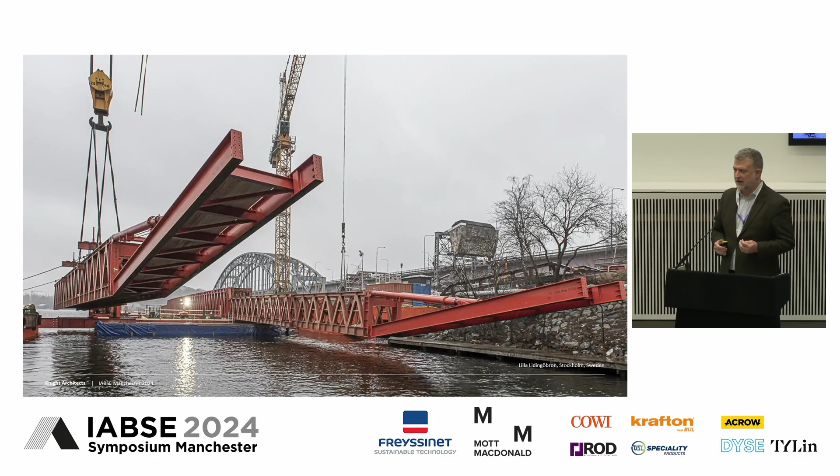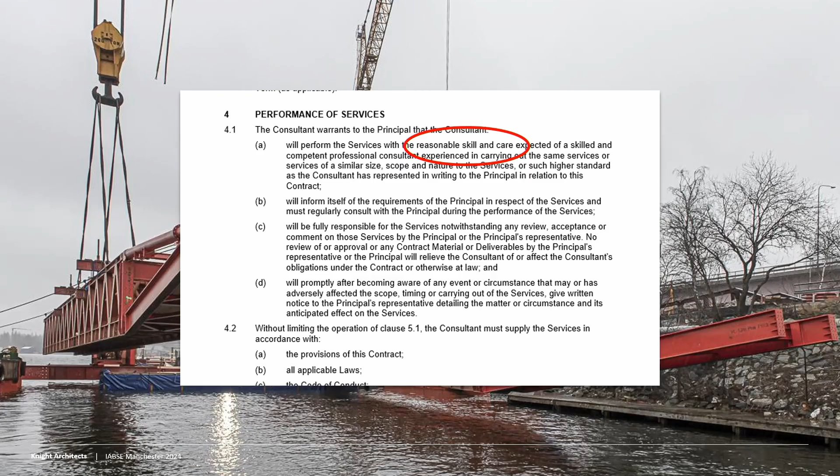And these are obviously highly important to ensure the safety and durability of what we build. So we focus on what's referred to as reasonable skill. They're a key component of our duty as designers, and they're typically enshrined in the contract terms we sign up to. I'm going to leave others to deal with those during the course of this symposium. There's a second part of that duty: to exercise care. And in the contracts we sign, that's interpreted as being careful, attentive, or cautious.

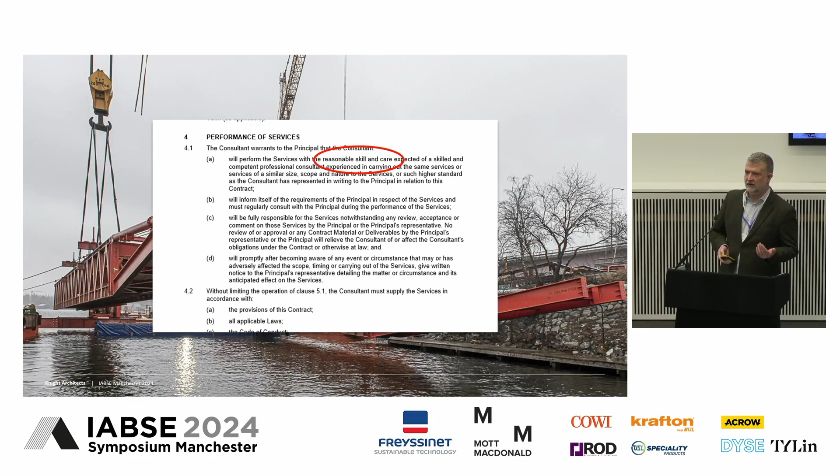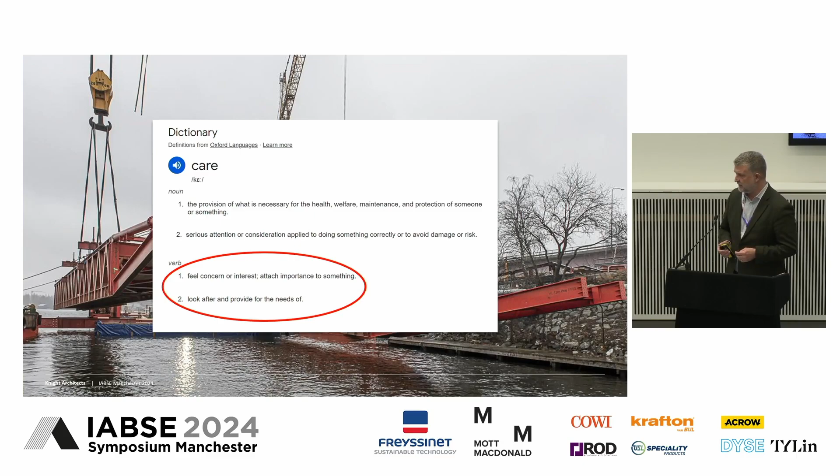But I don't think we should be cautious. I think, on the contrary, we need to be bold. And as Will has just said, boldness has to come from actions and thinking. So inspired by the theme of construction's role for a world in emergency, I'd like to speculate on what it means if we interpreted care as a verb instead of a noun. So, who cares? And I think, obviously, we all should.

Of course, we always should have, but now with the climate and biodiversity emergency upon us, and the gulf in social equity greater than ever both across the world and within countries, it's essential that we all do much more about why we are designing and building, that we care much more about why we are designing and building and who we are doing it for. And before we refine what and how we design and build. In short, why and who must come before what and how. My apologies if you've heard me champion this before.

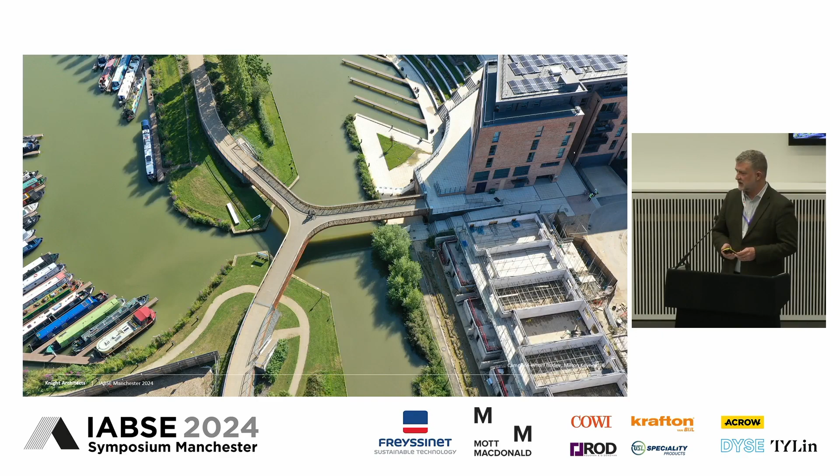Elsewhere in the conference, we'll hear from friends and colleagues who are experts in the assessment of embodied or upfront carbon. But it's obvious that we cannot make an omelette without breaking eggs, even in the refurbishment of existing structures. A creative approach is needed, such as building one bridge instead of two, to maximise the potential value inherent in the project if we are to justify its carbon footprint. So in considering this value for carbon, like we have long considered value for money, we can use our skills to care for the planet and for future generations.

Recently, I was presenting to a group of university students in Delft about bridge design and carbon, when I realized, of course, their generation didn't cause this emergency. They have inherited its massive debt, yet they also have the greatest chance to positively influence change. So they must be inspired and not intimidated or deterred by this challenge.

Or put another way, as behavioural economist Rory Sutherland puts it, asking people to do the right thing for the right reason is potentially setting the bar too high. The fact is, we need to inspire each other and the next generation to participate in the joy of great design, which brings equity, opportunity, pleasure to society, and addresses the climate emergency. So gatherings like this one in Manchester and the Future of Design event for young designers, not just engineers please, are essential to educate but also to inspire and to bring joy.

The joy of design for me comes from seeing it in use, making people's lives better in ways big and small, planned and unexpected.

As an architect practicing in the field of bridge design, which is the acknowledged territory of engineers, I am aware of the focus on function, from which form is supposed to follow, at least in modernist design philosophy, and this order encourages efficient use of materials and should provide solutions that are appropriate to their span and the load carried.

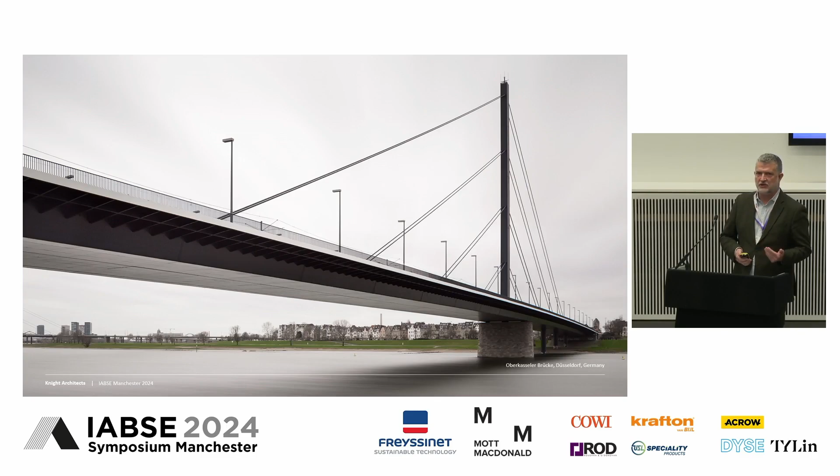But what exactly is the function of a bridge? In my opinion, the function of a bridge is to make people's lives better. This is a much broader and deeper challenge than simply carrying a load safely across an obstacle, which is arguably the minimum measure of performance.

A truly successful bridge should also look beautiful. Its design should respect and enhance its place, and after all, for centuries, great cities and communities have been founded upon great bridges, and the design of civil infrastructure is a measure of how a culture values itself and its people. History shows us that a useful bridge should be positioned and aligned to provide the most attractive route to users.

And in doing so, it shouldn't make the situation worse for others. It should act as a catalyst for improvement to the surrounding public realm. It must provide socially valuable connectivity, for example, by linking communities with jobs, education, amenities, and nature.

And in the age of a climate emergency, and at a time of energy crisis, the function of a bridge must include encouraging modal shift towards energy-efficient forms of mobility, such as rail, tram, and active travel modes, like our Lilla Lidingöbron in Stockholm. Because even while the use of electric cars increases, it's possible or even likely that modal shift will continue to accelerate away from private car use in cities where problems of congestion are unchanged by the power source.

These problems remain even when the car is parked, which is obviously most of the time, and a recent advertising campaign by the rental firm Dott really cleverly illustrated how space-hungry private cars are compared to cycling and walking.

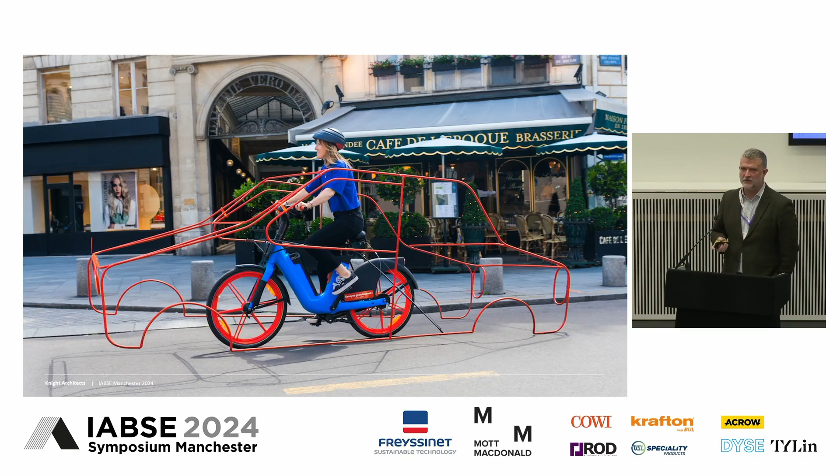And to those who complain this is politicising transport and infrastructure, I say this has always been the case. The building of infrastructure has always had a political component, and we shouldn't shy away from that discussion.

Importantly, once a user is taken out of the comfortable, isolating cocoon of a car, they become much more aware of the surrounding environment and other people. And it's this immediacy which demands design that is safe, enjoyable, inclusive, durable, and beautiful. For a bridge designer, the sensitive needs of pedestrians and cyclists are the greatest and most rewarding challenge.

My professional interest lies in the social benefit created by bridge design as much as their architectural contribution to cities and to landscape. And when good social intentions and beautiful design combine, the results are wonderful and long-lasting, yet supremely functional.

For designers, I think this duty to society demands thinking beyond the footprint of a building to consider how the surrounding environment is changed by the building. For designers of infrastructure, it requires imagination far beyond the basic requirements of moving people from A to B.

Bridges create networks, and it's this positive interaction of people, spaces, and places which create successful cities. Now, this has been recognised by many for a long time, from Jane Jacobs to Jan Gehl, and he stated, only architecture that considers human scale and interaction is successful architecture, culminating in his famous call, first life, then spaces, then buildings. The other way around never works.

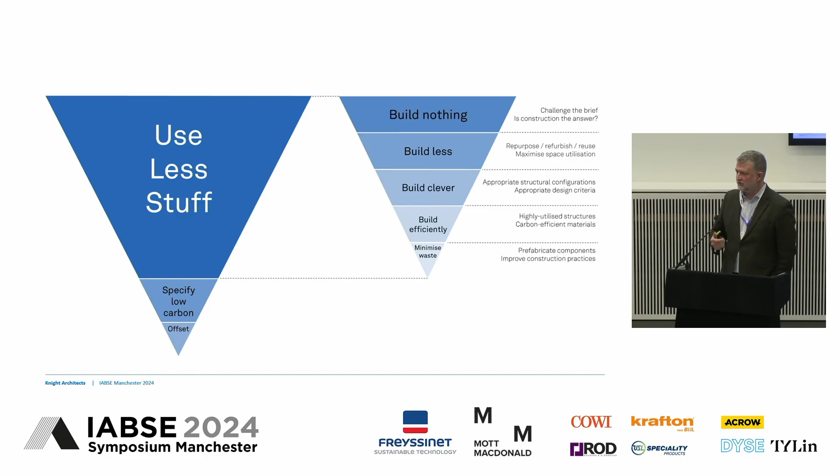And this is not as extraordinary as it sounds. There are many examples of bridges intended to satisfy a political need rather than an actual need, where equivalent functionality could be achieved with little or no carbon cost.

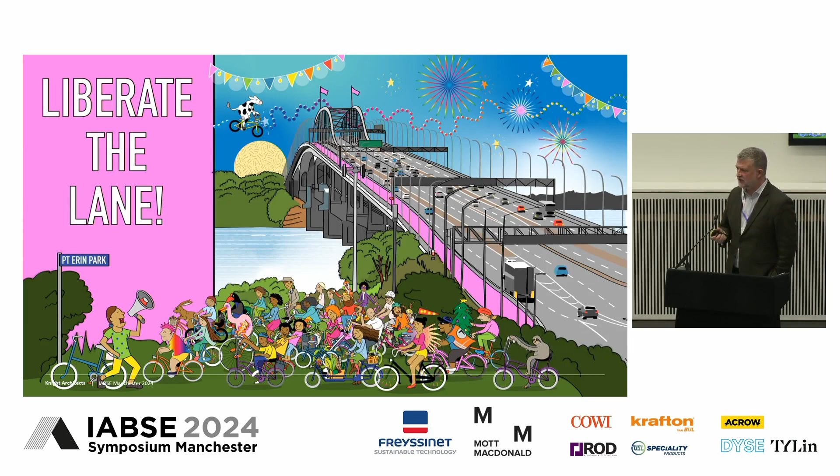Examples including this one: reallocate existing highway space to active travel uses, as campaigned for in New Zealand on the Auckland Harbour Bridge. This is both the easiest physical change and the most difficult political change. It imposes behavioural change upon society at large, and in doing so it risks short-term and indiscriminate inconvenience.

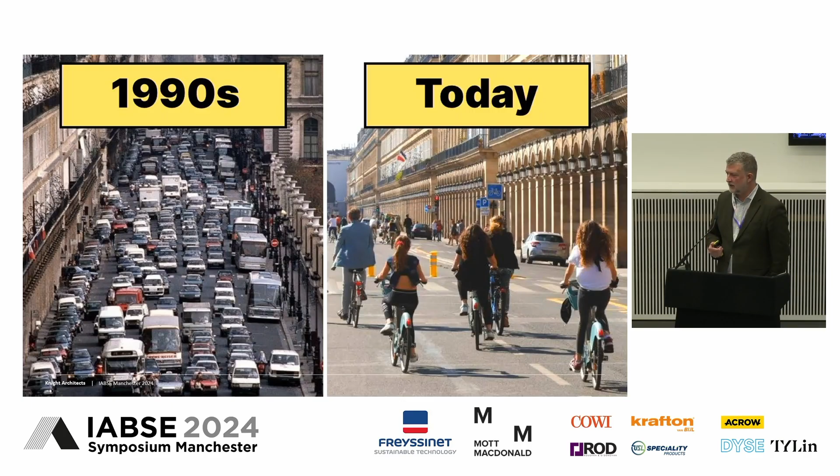Yet the reallocation of existing road space, especially on totemic structures like bridges, is powerful medicine. It should be implemented with careful anticipation of the consequences. But the radical temporary changes we saw in Paris, in London, in many, many cities around the world during the corona pandemic, many of which remain in permanent form, demonstrate this approach is valid with sensitive leadership and with clear communication.

Indeed, according to the inspirational Chris and Melissa Bruntlett of the Dutch Cycling Embassy, and if you haven't heard of them, look them up because they are really cool, Paris's cycling revolution shows no signs of slowing. Each new network piece appears, and with that, more cyclists come. They now outnumber cars by 50% in Paris. From the early 1990s to the present day, driving within the city limits of Paris has fallen by 45%, public transport has risen 30%, cycle use has increased by 1,000%.

These are truly impressive figures. They're extraordinary, and they are replicated around the world. I mean, we all know about Amsterdam, we all know about Copenhagen, but they are now increasingly happening all the way around the world.

I've never really understood cycle counters. It's one of the things that bugs me. The live data they provide is completely meaningless to the person passing it, but how much more meaningful and rewarding it might be if they counted down from a target which represented something tangible, even motivational, like the carbon cost of a cycle bridge, or the daily energy consumption of a school or hospital. So each trip had a meaning, and some cyclists were incentivized.

I think the visualizing of carbon and energy consumption at an everyday level would undoubtedly help society address its reduction, even if this does perhaps risk combining the right thing and the wrong reason.

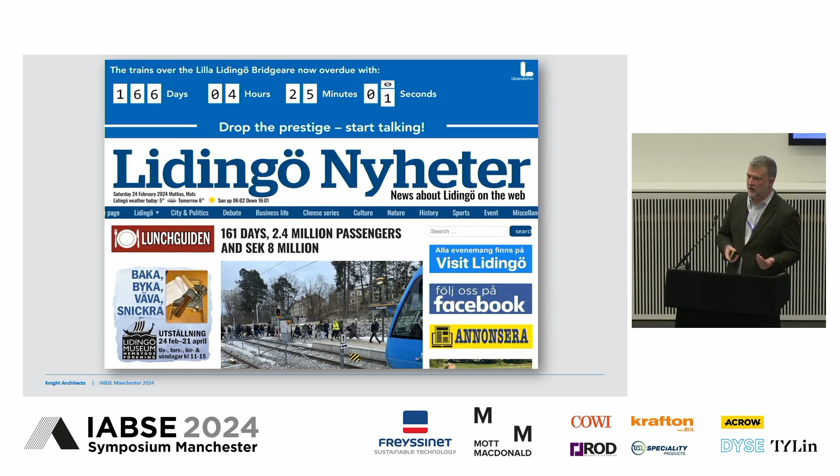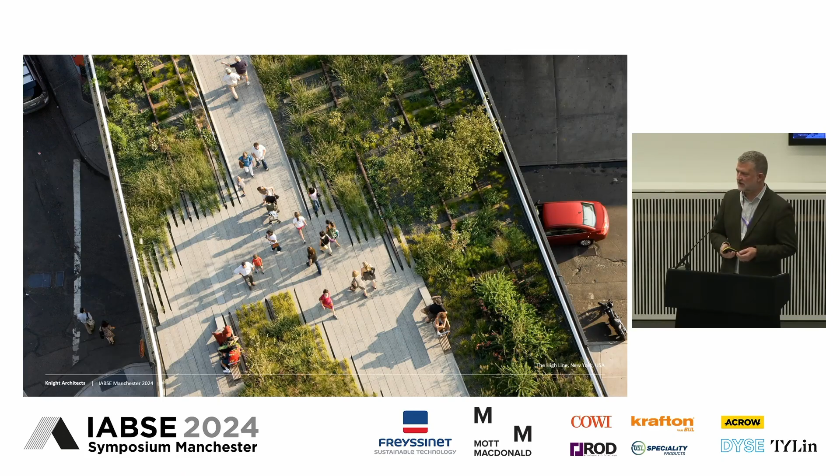The decision to provide new infrastructure doesn't necessarily mean building anew, of course, and there are increasingly numerous examples of existing infrastructure being rehabilitated and repurposed, and the most well-known example is obviously the High Line in New York. But every city has similar examples of smaller, discrete bridges whose refurbishment could provide significant new value without the heavy investment in carbon of a new build.

This is the Castlefield Viaduct. It's less than a mile from here. I think it's that direction. And if only their potential could be identified early enough, and designers were encouraged to think of them as a creative catalyst rather than a liability. I mean, I think this is potentially a business opportunity for all you engineers.

With some joined-up thinking, the regular structural health monitoring inspections that are undertaken by and for bridge owners should be an easy source of such data, to identify which structures can provide new life.

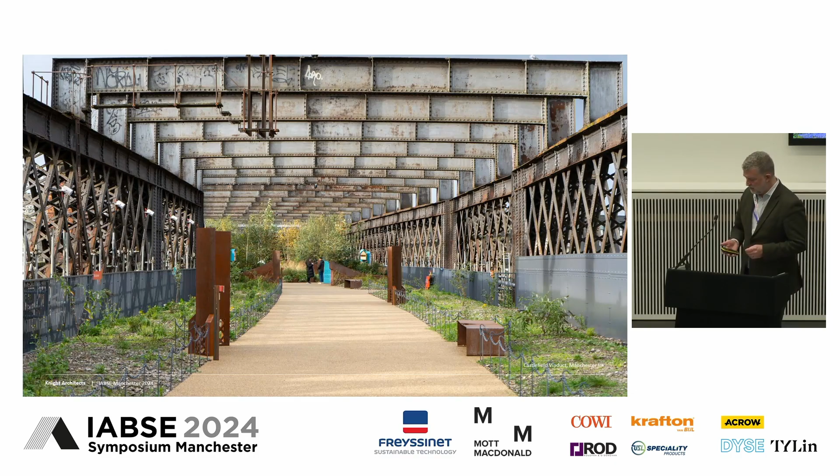The world of infrastructure lags behind the world of property in this innovative thinking. And London, I know firsthand, has recently seen a dramatic increase in the retention and the extension of buildings, often exploiting their original structure with intelligent analysis to extract greater load-carrying performance in combination with new lightweight components. And this trend seems likely to accelerate due to financial incentives based on carbon performance of buildings.

Ever since the understanding of material properties allowed bridge engineers to design structural forms that span further than individual components, the importance of achieving lightweight solutions has been evident in the best examples of bridge design, at whatever scale.

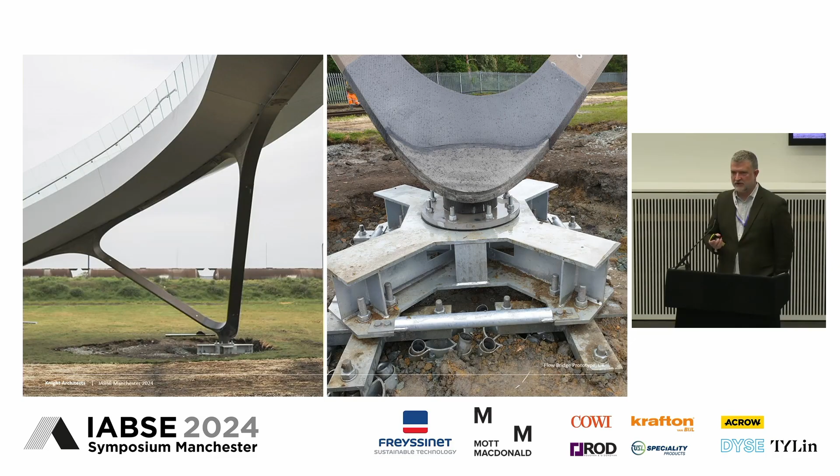Reducing that superstructure weight allows further reduction in foundation design. These are built without concrete. They are removable. So as well as shortening programme and reducing the size of construction risk, there are consequential benefits all along the piece of reducing the weight.

And you don't have to look far along the lines or the routes of historic railways to find redundant structures with great potential. All across Europe, anywhere where the railway has had such a big footprint.

But if they're only seen as a burden and not as an opportunity, then the result is wasteful. And it can be as disastrous as this infilling with 1,000 tonnes of concrete of the Great Musgrave Bridge in 2021 for completely spurious safety reasons.

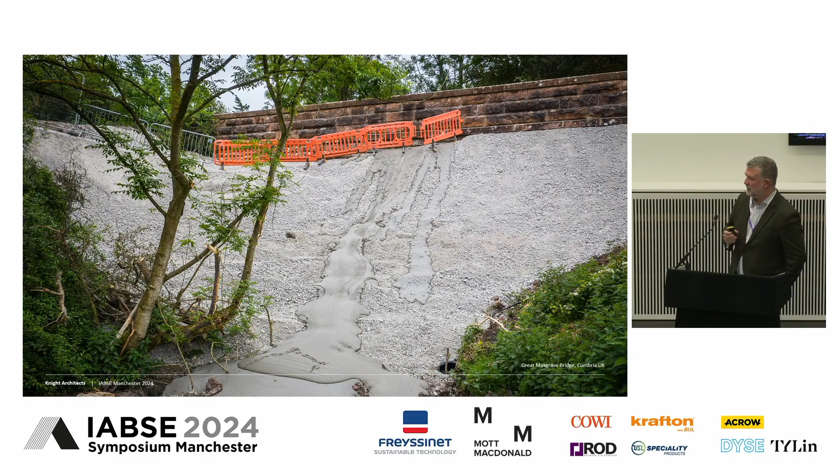This bridge, which had lived for rather a long time, was no longer apparently capable of carrying 40-tonne trucks. It was infilled with 1,000 tonnes of concrete at a cost to the public purse of 124,000 quid and blocked off a potential route for people and nature.

There was wonderful outcry amongst the industry as a whole. The action was undone last year at a further cost of £431,000.

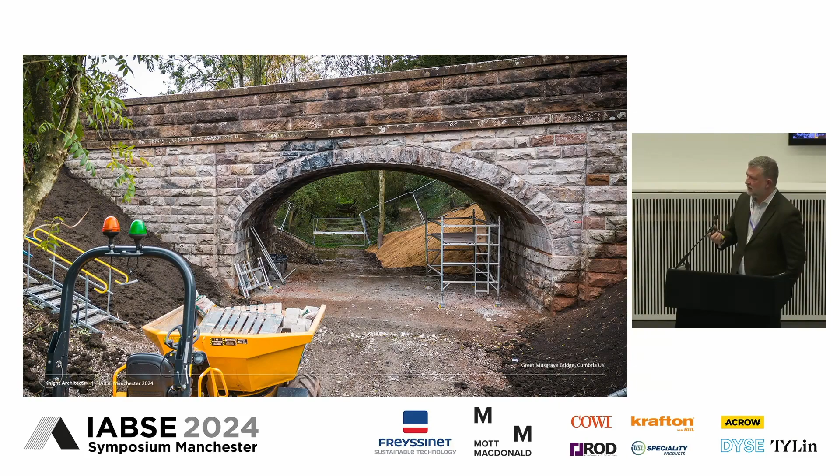But the situation isn't unusual, and there are hundreds of historic bridges which are suited to repurposing, whether as a whole or by combining robust existing foundations or support piers with new lightweight spans.

Working with S82 Consulting for Clackmannanshire Council in Scotland, we proposed the reimagining of the support piers of the 1885 Alloa Swing Bridge to carry a replacement deck for pedestrians and cyclists.

50 years after the railway and the bridge deck were dismantled and removed, the carbon invested in the original construction can still provide further returns for society.

In this part of Scotland, the natural obstacle of the wide River Forth currently means local amenities must be accessed by car. It's a huge barrier to movement, but a replacement deck would link people to work and education, and it would link them with zero carbon travel. It's a really obvious approach.

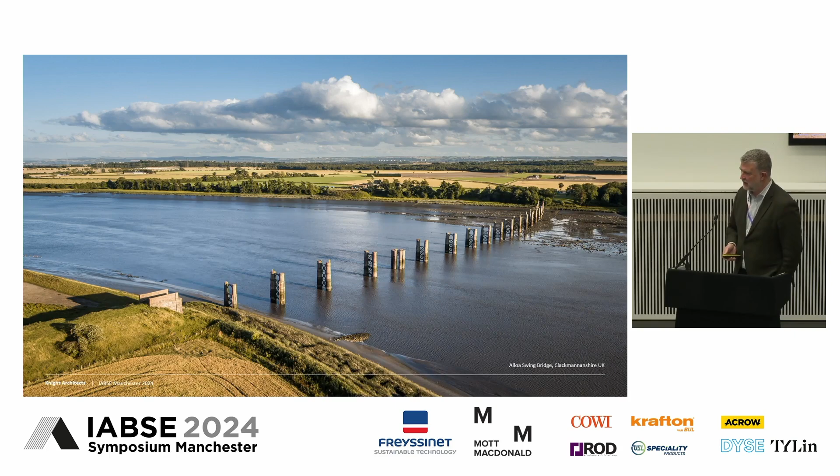Sometimes we might even see a departure from absolute lightweight solutions towards those which provide robust structures and embrace the carbon storage potential of timber.

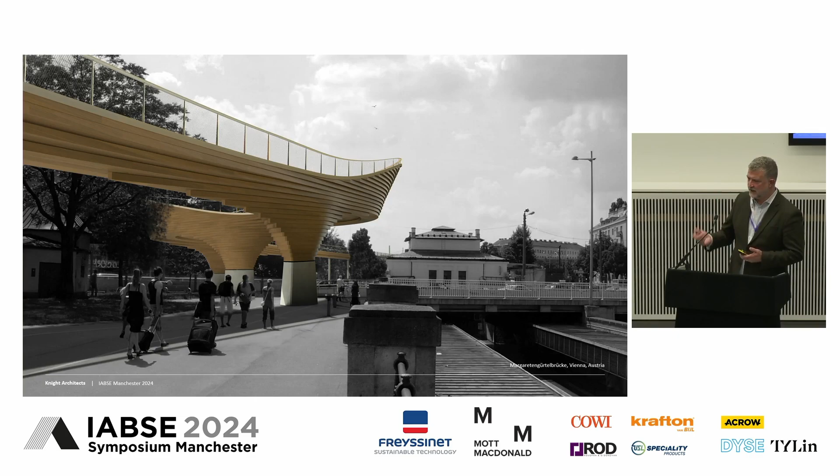An example is our 2010 competition-winning design for Margaretengürtel Bridge in Vienna with structural engineer Knippers Helbig. This was planned to link two urban parks across a busy traffic corridor and provide a cycle route between parts of the city. The linear form evolved from the landscape, and its massive minimalism was conceived in counterpoint to the architectural language of the neighbouring 1899 station designed by Otto Wagner.

The design of the structure combined a glulam core of spruce lamella and a larch outer layer for durability and protection against moisture. The bending radii of the glulam layers followed standard production techniques, and areas of peak stresses are reinforced with threaded stainless steel rods.

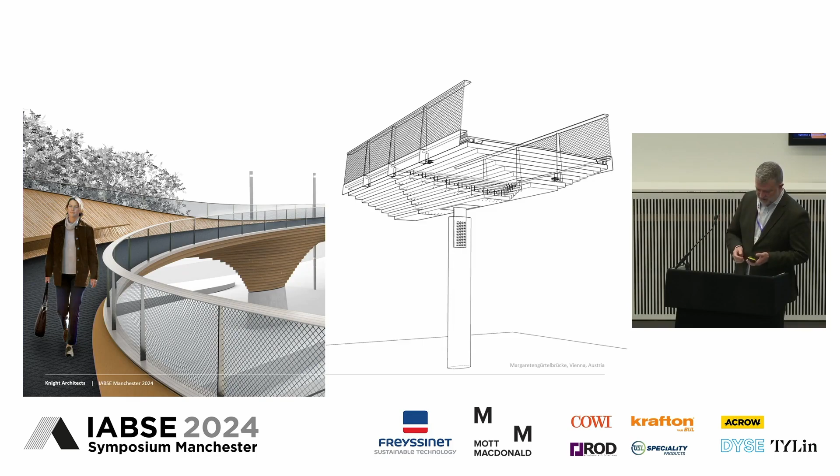So although unbuilt, several examples of this structural concept have subsequently been completed by Knippers Helbig, including a family of spans at the Remstal Garden Show in May 2019.

The development of traditional timber building techniques demonstrates elegant and environmentally responsible construction, being both a carbon sink and an efficient use of renewable resources, if they're providing a useful function. Using a locally common building material in Austria with a relatively low processing cost, it was estimated the superstructure would contain around 800 tons of stored CO2 within almost 1,000 cubic meters of wood, and would use a fraction of the energy in construction of an equivalent concrete or steel bridge.

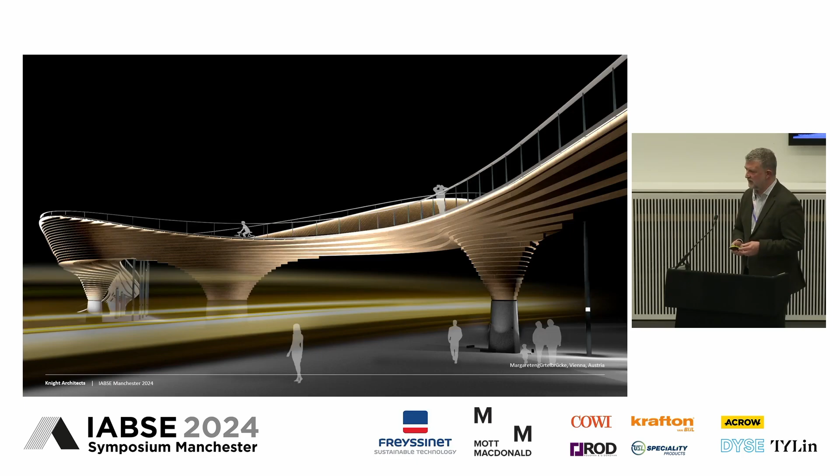Returning to the highest function of bridges to improve people's lives, our future bridges must prioritise the needs of the weakest in society to provide safe, enjoyable routes, spaces and places, and to improve accessibility and social inclusion. This can be a major challenge for us, particularly in a world where topography and the conflicting demands of existing infrastructure force bridges up and over, resulting in excessive gradients or distances.

But unpicking existing routes, such as this addition of a ramped cycleway access to the Lower Lea Crossing, can provide new links in urban settings where land ownerships and building structures otherwise appear to dictate solutions.

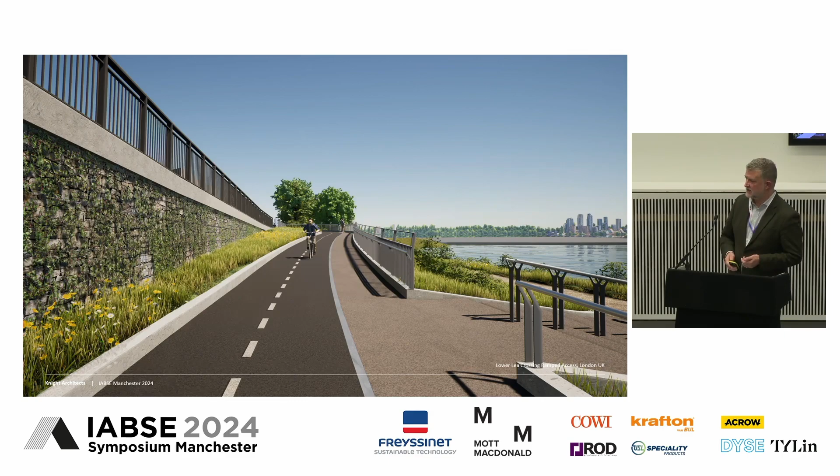There are loads of really inspiring examples on this, including the Bowline at Bowling Harbour by Rankin Fraser, landscape architects for Scottish Canals. This combines the creative reuse of heritage infrastructure with new infrastructure. It provides an accessible and enjoyable new community asset. It includes shops and facilities along its route. It benefits nature and biodiversity.

So this kind of creative reuse both accommodates change caused by ageing infrastructure and helps to accelerate change towards a less car-dependent, low-carbon urban transport system.

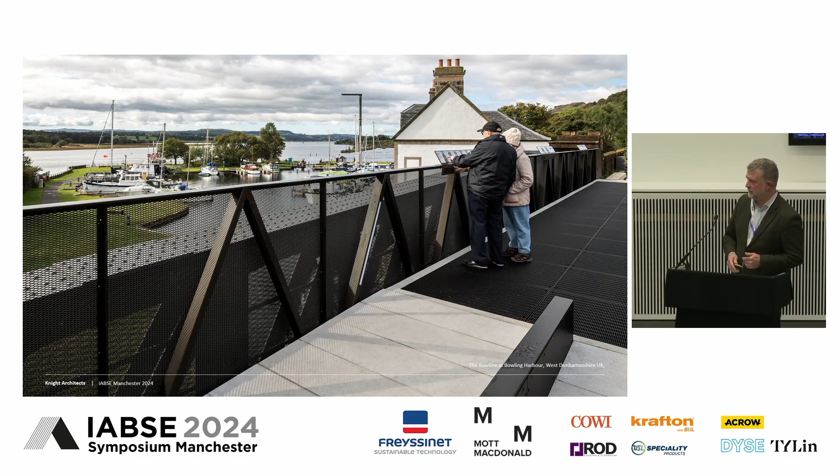And while looking to the changing future, we also have to deal with the immediate consequences of the climate emergency. Extreme weather events are now measured in decades or even years, so we must ensure what we design now is ever more robust and reliable.

Opportunities must be imagined where the benefits are multiplied, and this is well illustrated by our Knostrop Bridge, which was completed in 2017 as part of the Leeds Flood Alleviation Scheme.

By providing a replacement crossing of the River Aire, using the new weir structure to provide supports for a series of lightweight steel structures, a section of the National Transpennine Trail was made accessible. A modest new landmark was added, and that provides connectivity and enjoyment for recreational and commuter users alike.

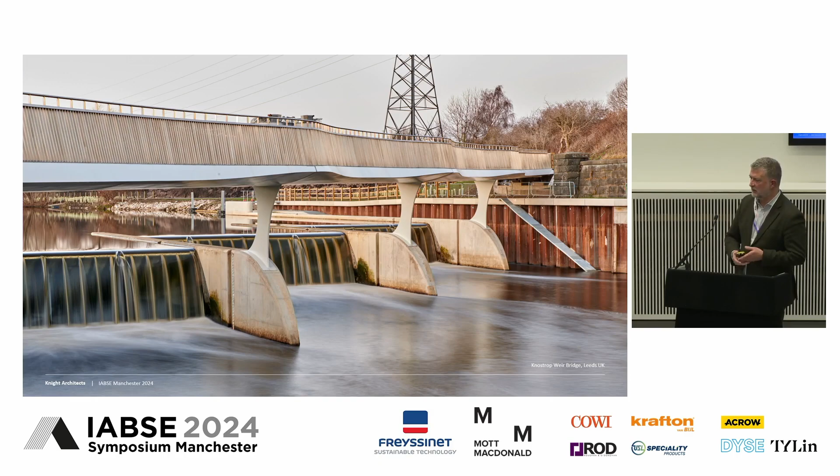But the approach to multiplying the benefits of a project is unlikely to be realised by conventional linear thinking. Collaboration between architects, engineers, landscape architects and provocateurs of all kinds encourages a creative dialogue that can result in innovative solutions, which combine form and function to address multiple challenges and solve problems far beyond their original parameters. In doing so, much greater value is achieved for the financial and carbon investment.

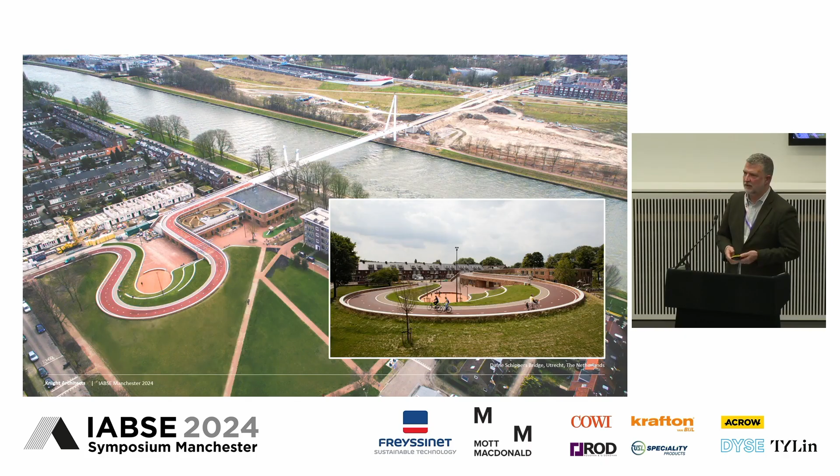The Daphne Schippers Bridge by Next Architects with Arup in Utrecht integrates a lengthy approach ramp with the landscape surrounding an infant school, creating a unique sense of place, a strong identity of connection with the neighbourhood. The fact that cycling is at the heart of the solution is arguably natural to people in the Netherlands, but maybe not to the rest of us, or maybe not yet.

Many of these examples have ingredients that are important to cycle users, and especially to the huge number of people who are cyclists to be. In other words, who don't yet cycle because they find it potentially intimidating.

Perhaps the most powerful factor in securing their commitment is providing separation from highway modes. Our Abbey Chesterton Bridge in Cambridge, which is part of the new Chisholm Trail, means cyclists don't have to share the road with motor vehicles all the way through the city centre of Cambridge.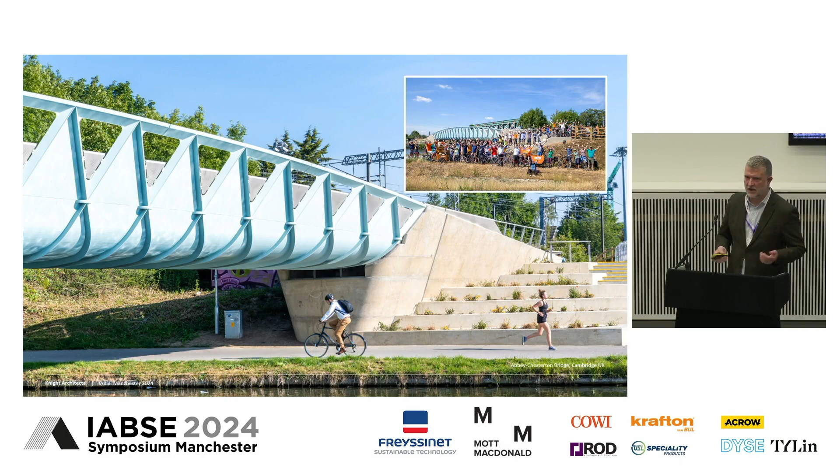The two slow modes, cycling and walking, can coexist safely. And this kind of coexistence has been referred to in Denmark as forgiving infrastructure, with comfortable widths and gradients that allow novices to coexist with experienced users, and which accommodate the speed differential with some kinds of e-bikes and scooters.

The sensitivity of users means the cycle infrastructure design should not be thought of as a type of highway design. That's really important. Identifying that cycling is a social activity, so space must be allowed for cyclists to ride side by side, is one of the key observations in the Dutch CROW Guide.

And this might result in slightly wider bridges, but the change in the increase in comfort will attract many more users and reduce the carbon payback period. We shouldn't be mean.

Linking new residential developments across highways, it's essential that we provide dedicated active travel provision from the outset, so people are not dependent upon cars.

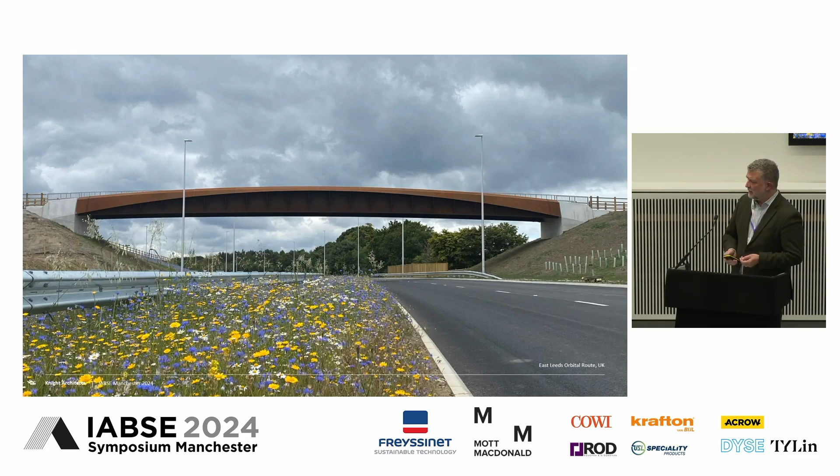But by providing continuity of habitat, re-establishing routes severed by linear infrastructure, we can start to undo the damage.

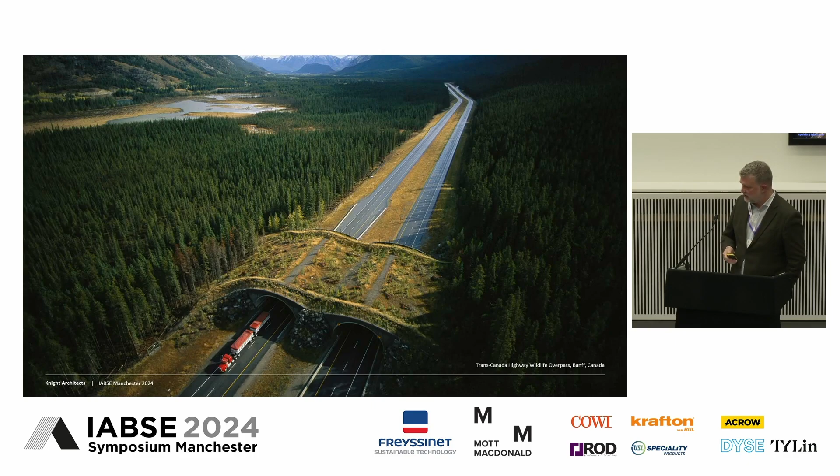And building on the idea of forgiving infrastructure, could we not follow the example of visionary cities like Oulu in Finland and plan for year-round use, even when they have extreme weather that most of us don't really experience?

Why not generous infrastructure that not only facilitates energy-efficient, healthy and socially valuable A to B journeys, but is regenerative in its aims, so that it supports thriving flora and fauna, sustainable drainage systems, provides trees for shade, undergrowth for habitat, as well as providing common places for people to meet and dwell.

In other words, in everything we design, how much bigger can our thinking be?

Many of these ideas are familiar and proven because they were in place before the rise of the private motor car. But returning to them means reversing the decades-long growth of car traffic in cities. Yet, as we saw during the corona pandemic, beneficial change requires strong leadership at a city level.

As bridge designers, we can support our politicians and clients to create positive briefs and encourage the sharing, celebration and rewarding of the best examples.

So when it comes to creating sustainable urban environments now and for the future, it's not enough to only be good designers, to enjoy our jobs in quiet luxury. We must be advocates, ambassadors and agitators for change and for good design in all areas of life.

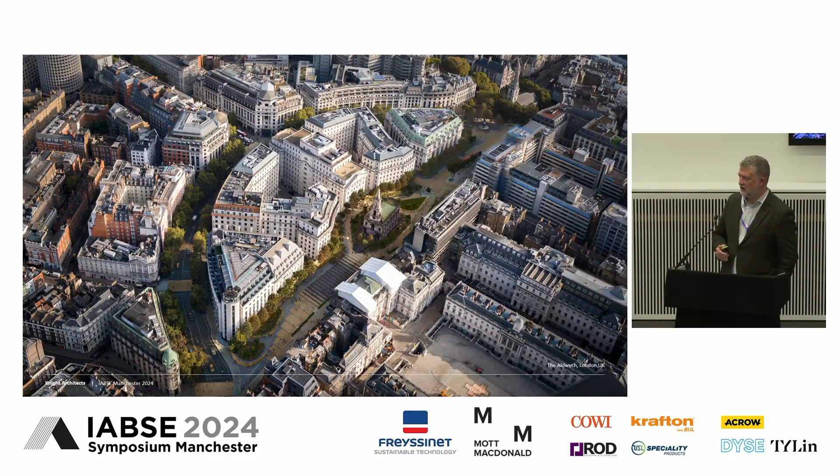What seems impossible or hard at first will become easier as the benefits accrue until it's the norm, and society, politicians and asset owners all embrace this opportunity to change.

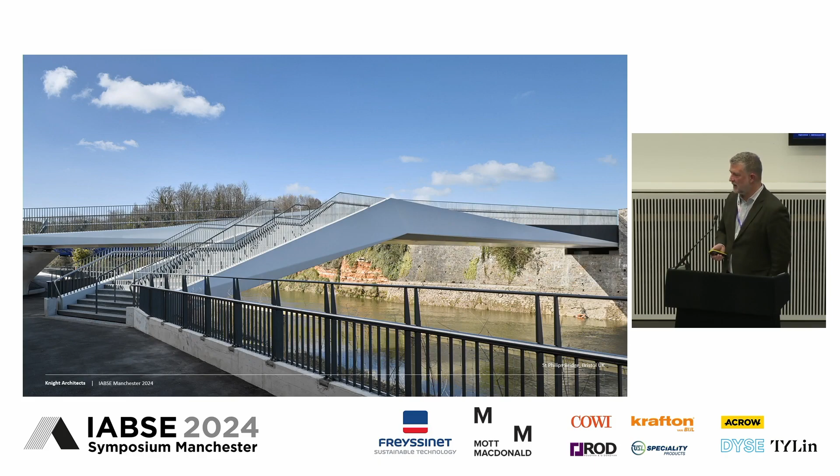But of course, all these excellent, inspiring examples come from ordinary individuals working collaboratively to make ordinary projects into the extraordinary. Working together, we are greater than the sum of our parts, and together we are creative, curious, committed, but above all, we care about design. It's why we're here. We care about the planet, we care about places, and we care about people.

On that last note, about collaboration and people who care, and just a slight digression, I'd like to pay tribute to the specialist steel fabricator SH Structures.

The end of SH Structures is a really sad moment. I pay tribute to them and to everyone else who helps realise the vision of clients and designers.

We are in the middle of this process. The clients above us, we have to inspire them and drive them to actively change. But we also need the specialists and the contractors and the fabricators to work with us. The demise of really skilled outfits is a shame. We have to support them too.